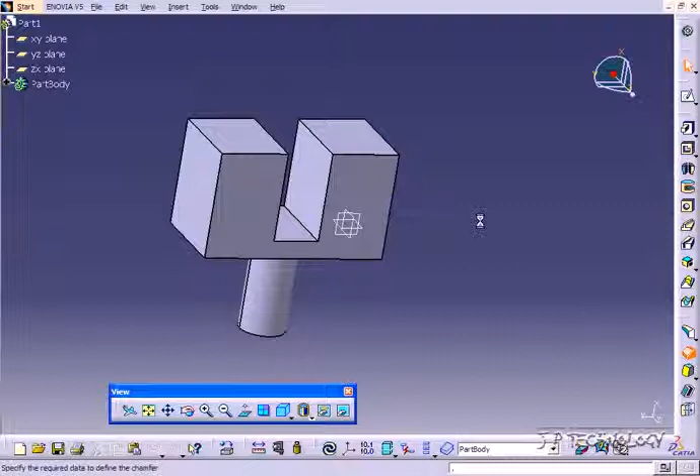Let's start doing some. Let's click the chamfer tool, and you're able to flip through some of the modes. You can have a length and angle, or a length and length. These are just two different ways that you're able to position and determine what your chamfer will be and what it will look like. For the first one, let's just do a length and angle.

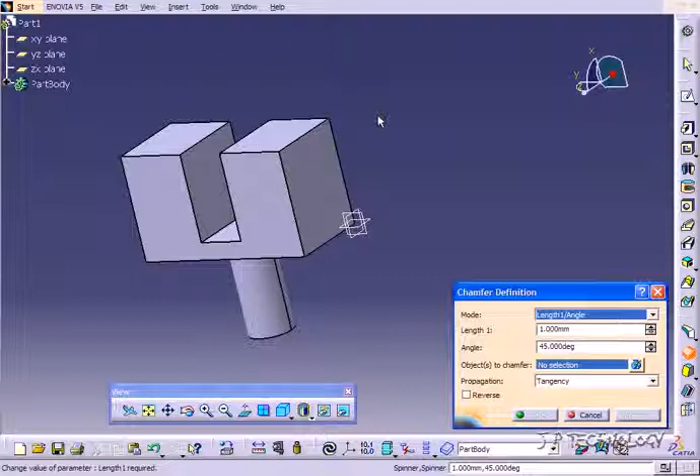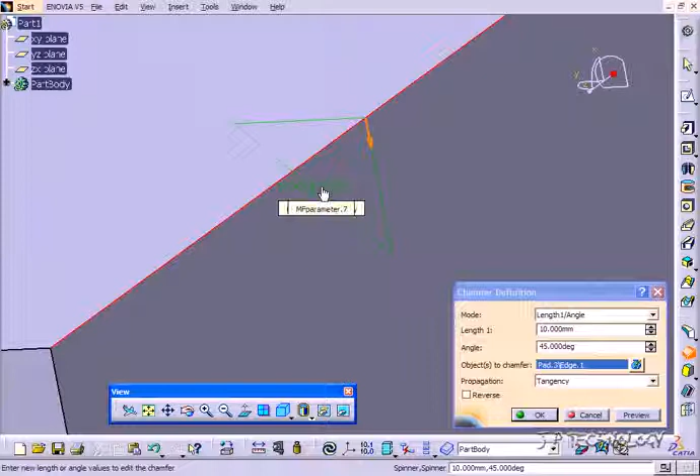So let's do it to this edge here. We'll click this edge here. You can see right now what we have is a 1 millimeter length at a 45-degree angle. Now let's change this to 10. Click preview. So we can see that green triangle is going to be what our chamfer looks like. Right now it's at 10, 45. Let's click OK.

And now we've cut out the chamfer there.

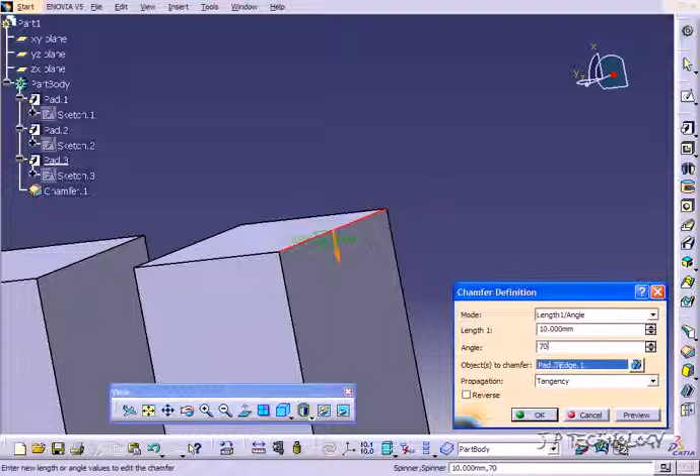Now let's open the part body, and you can find the chamfer in the part body there. If you double click on it, you're able to adjust some of it. Let's change the angle to 70 degrees. Click OK. And now it's swept back there 70 degrees.

Click it again. Let's do it 20 degrees. Click OK. And now it's swept down 20 degrees. So you're able to play around with these dimensions even after you've already made your part.

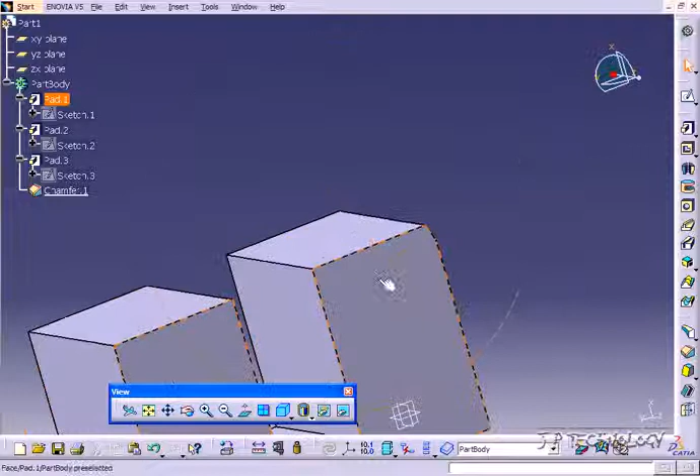Now on the outer edges such as this, you're going to be taking away material. And if we do an inner edge here, we're going to be adding material. So let's click the chamfer, and let's click the inner edge here. We'll make it 45. Click OK. And you can see that we've added material there.

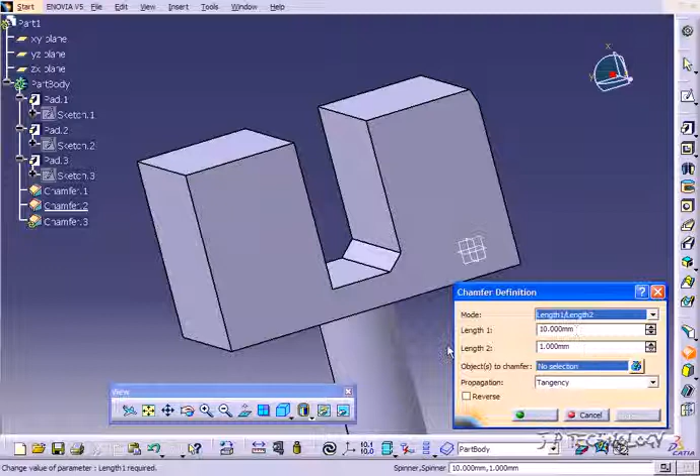Now let's try and do one that's the distance. So let's click chamfer, and we'll do length, length. What you're going to get is two lengths. So if I click this line here, and if you zoom in, you can see that for my length 1, it's 10, and for my length 2, it's 1. It's just going to create it.

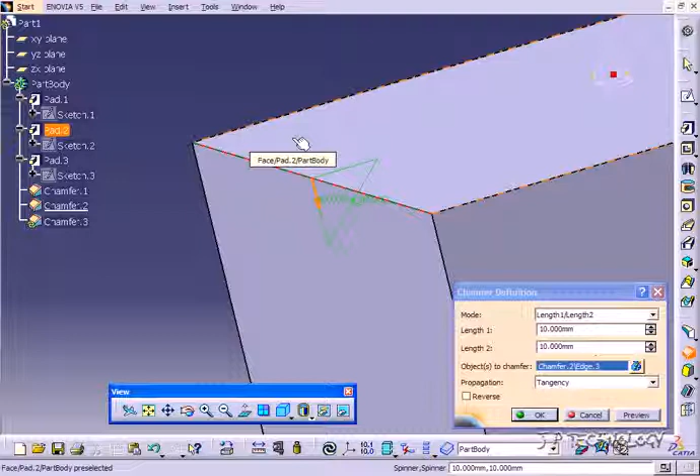So if I did a 10 by 10, click preview, really that's the same as having a 10 millimeter chamfer with a 45-degree angle. It's just a different way that you're able to parameterize your chamfer definition. Let's click OK, and you can see that it cut out a 10 by 10, and it's also like a 10, 45.

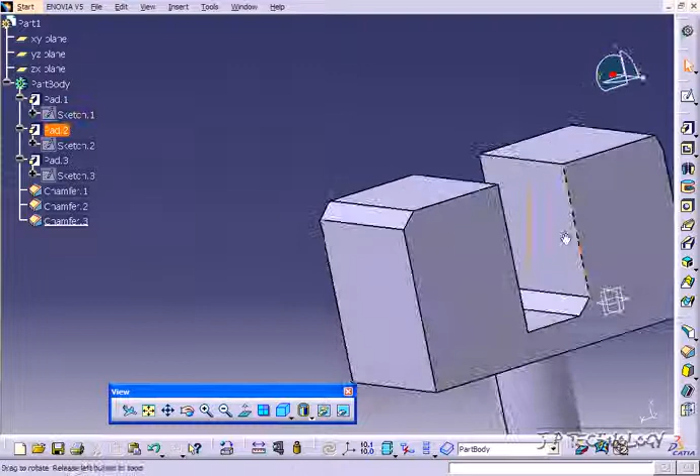Now you're able to do more than one edge at a time. So let's select a few multiple edges. Click the chamfer tool, and let's click this edge, this edge, this edge, and this edge. Let's make it 10 by 10. Click preview, and it'll give you a preview of what it's going to look like. Click OK, and we've chamfered it off with a 10 by 10.

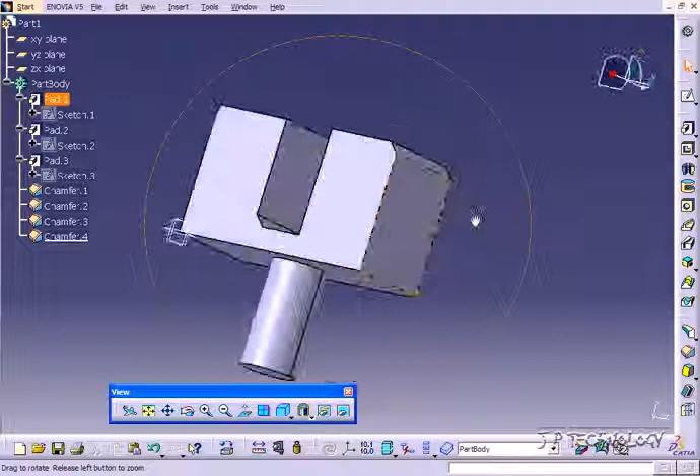Now you're also able to choose an entire face. So let's choose this entire face here. Click the chamfer tool, click this face here, and we're going to do 10 and 10 all around. Click OK, and it's done at 10 and 10 all around. Clicking on a face saves you some time, as all you have to do is click once on the face rather than clicking 4 separate edges going all the way around.

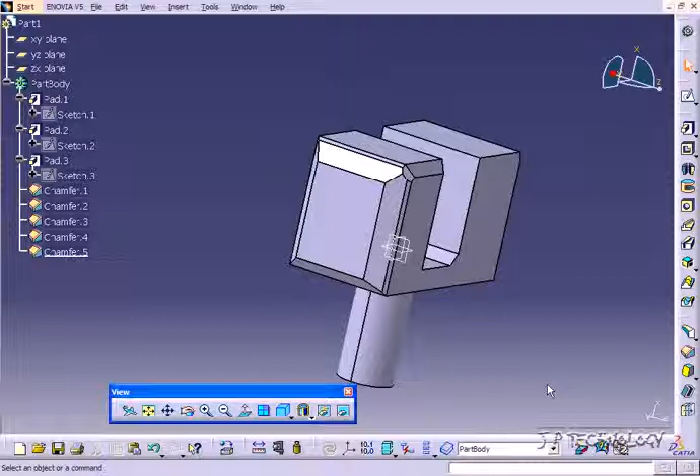Now let's do one that's around the circle here at the base. Let's click the chamfer tool, click length angle, and click the circle down there. Make it 10 and 45, click OK, and it's added material, creating a chamfer at the bottom.

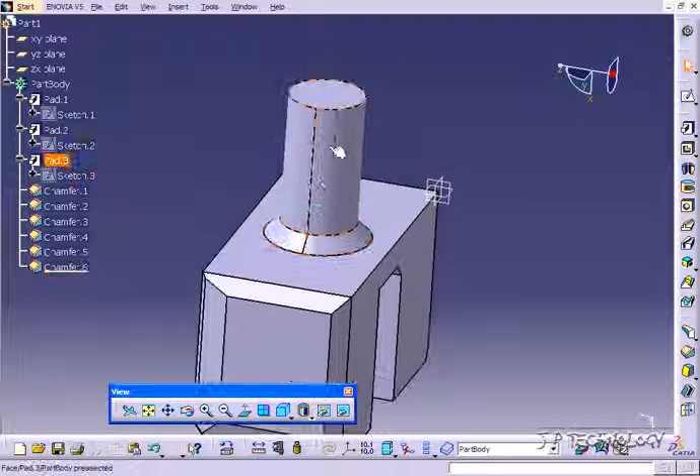Now let's do the same to the top here. Let's click chamfer, click the circle, click OK, and again we've added another chamfer to the top there.

So the chamfer tool works pretty much exactly the same as the edge fillet. You're selecting a single edge, multiple edges, or a face to create a fillet or a chamfer. And with the chamfer, you have the option of using a length and angle, or 2 lengths to create your chamfer.

And that concludes our tutorial on how to use the chamfer feature within Catia v5.